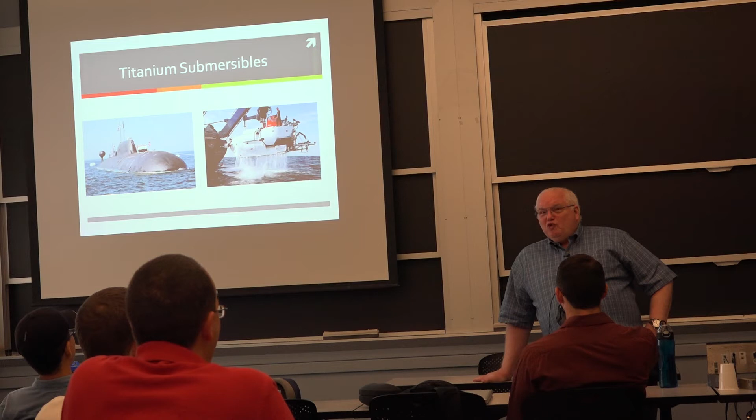2 million Americans went across the ocean, and they didn't have a whole fleet of ships in 1917 to do it, so they created the Emergency Fleet Corporation. It turns out the Germans scuttled every German ship in every port in the United States when the war was declared. They tried to destroy them, and I can give you articles from a history of welding on how welding was used to repair and bring these ships back into service, even though the Germans tried to sink them in the harbor as they sat there. So welding was important, and Comfort Adams realized that welding should be important, which led to the formation of the American Welding Society in 1919.

That's about the time arc welding started to surpass resistance and oxyacetylene welding. In Europe, we actually know who it was: in Göteborg, Sweden, one welder stuck his bare steel electrode in the mud and welded with a muddy electrode. That's the basis of shielded metal arc welding, mineral-coated electrodes.

Now we have special mud that costs about $10 a pound, very chemically controlled. We use things like old tobacco stalks for the cellulose. Anybody know why we use old tobacco stalks? That's actually a proprietary secret, though it's not much of a secret.

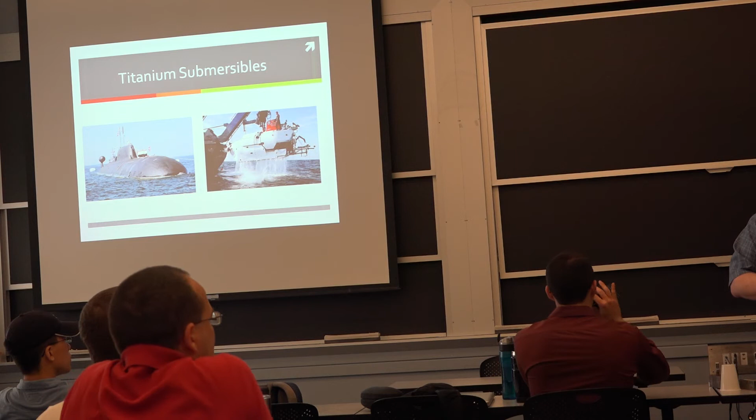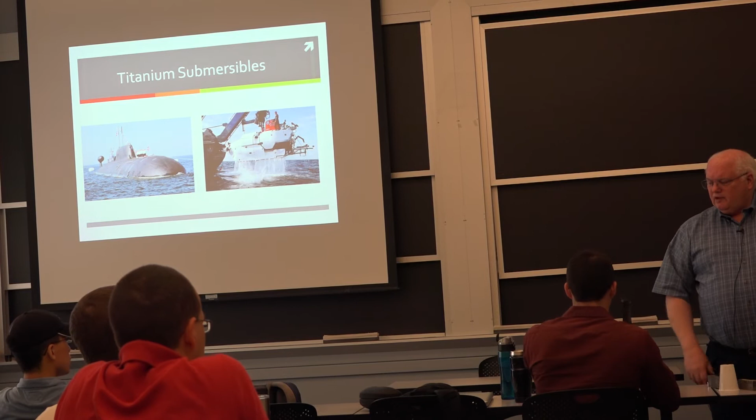So this is a turbine blade, or three stators that go in a civilian engine. This came off a Mexican Airlines commercial jet. If you look carefully, you'll see a darker color at the bottom - that's because these have already been repaired once, and they put an aluminized layer on there to help with oxidation resistance. This one came out of an operating engine, and it had a lot of other blades like that, that had failed.

Due to sulfidation corrosion. We might talk about that sometime, but just to give you an idea of some things. This looks like a postcard cutter. This one failed in operation.

The honeycombing is the seal. When the thing's spinning, you actually put a honeycomb in there, and as the blades get longer in service, they rub up against it. They're intended to rub and seal the surface, so the amount of elongation of the blade in service is approximately the thickness of that honeycomb layer. It forms a very good seal because it's a wear seal.

So it's just due to heat and angular momentum? Like it spins, these grow in length over time? Yeah, the heat, the creep of the metal. The metal under stress, radial stress, centrifugal stress, grows over time, but the whole efficiency of the engine has to do with how good the seal is.

The original engines, which were not very efficient - maybe we'll talk about that a little here - they basically just had labyrinth seals, which were kind of rings that passed each other. But eventually they got into the honeycombs, which actually use a wear surface. That's a very good seal, and I think there's less than 1% loss, because whatever you lose, you're losing compression - which is pressure and temperature, that's what makes the engine run.

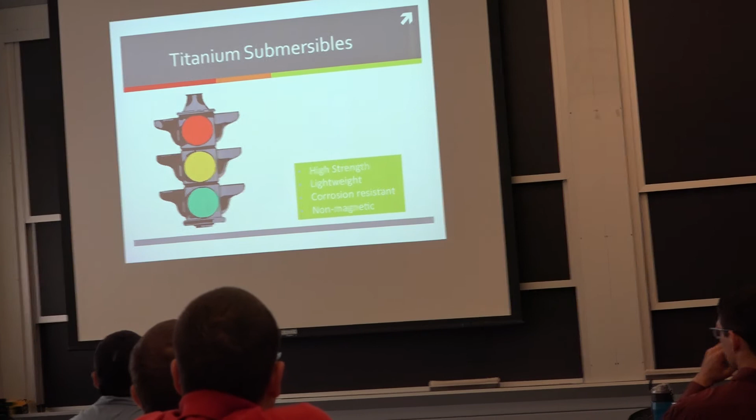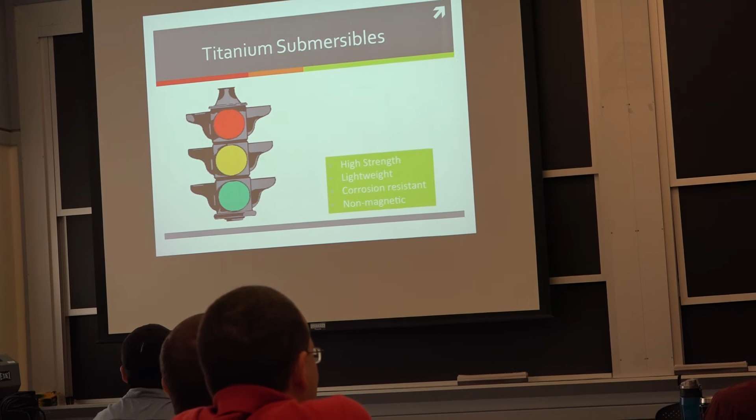So let's talk about titanium submersibles. There's both civilian and military reasons for using titanium in submersibles. Some positive reasons: it's high strength, lightweight. Why do you need high strength and lightweight for a submersible? To come back up - if you lose power, you'd like to just let go of some ballast and float to the top. That works best with high strength and lightweight.

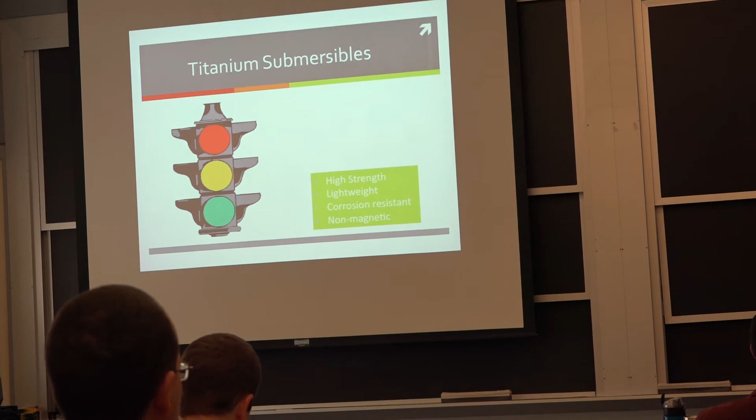You can go deeper with high strength and lightweight. You also want something that's corrosion resistant. The Achilles heel is steel. In material selection, steel makes up 97% of all metals used, but its Achilles heel is corrosion resistance - unless you're from the steel company, you know everybody has to replace it every 30 years. But titanium essentially lasts forever. We use it as medical implants in the human body because it can tolerate that saline solution for the life of the patient.

Without any noticeable corrosion, and it can do that for ships too. In fact, they went from a 30-year lifetime on a ship to now advertising ships that are supposed to last 50 years. They had to get away from carbon steel because most of it was full of holes after 25 years. Did any of you serve on those ships? We still do carbon steel inspections all the time, well, for the first 2 years anyway. But with titanium, which is a bit more expensive, lightweight, thin wall, there should not be any real corrosion problems.

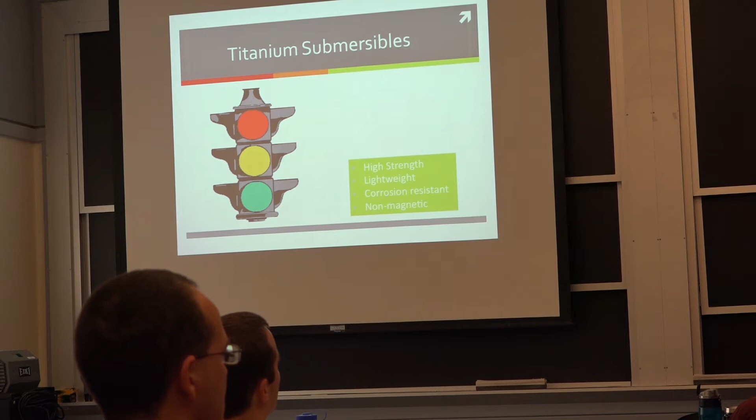Anybody know of any corrosion problems in titanium piping? It's not really corrosion, but there's a lot of growth inside of it, biological growth and other things. So now we do that on land too, we actually put biocides in the water in our boilers. Well, you probably don't do that in your boilers. Oh, we just use chlorine generators. Okay, so anyway, there's different ways to do things.

Another big military thing is non-magnetic. And why do you want to be non-magnetic? Signatures. Signatures for what? Mines. It turns out the superconducting quantum interference device is called a SQUID. Anyone ever heard of a SQUID?

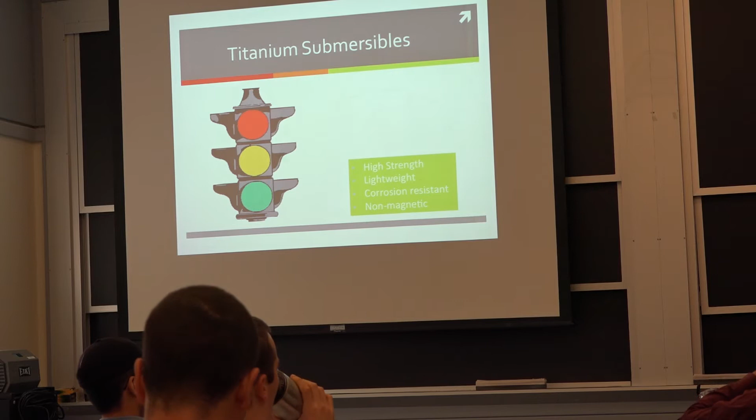I'm not talking about the ones you eat, this is a device invented by Brian Josephson in 1962, when he was about 22 years old. He didn't invent the SQUID, but he discovered the Josephson effect. He was a 22-year-old graduate student at Cambridge, and his professor didn't have time to talk to him, so he gave this new student a standard math problem to go solve. Brian was so naive, he didn't know you were supposed to throw out an inconsequential term in the differential equation.

You guys are learning how to solve these problems, right? Maybe one of you will make a mistake on your homework and win the Nobel Prize. But Brian essentially didn't know to throw out this term. He solved this incredibly difficult problem with the complete term included, and discovered the Josephson effect, which says that even for DC currents, you actually get an AC component with superconducting energy flows. It's now known as the Josephson effect.

With the Josephson effect, you could measure very precise magnetic fields. I met Brian Josephson in about 1970. He had already won the Nobel Prize when he was like 24 or 25, and he was an absolute basket case. He was not ready to win the Nobel Prize in his mid-20s, and everybody thought he was the brightest guy in the world. He knew he had made a mistake, but he was smart enough to recognize it was something unusual.

In the 70s, a plane flying overhead with a superconducting SQUID could detect something under the water that was long and magnetic, for its magnetic signature. It was projected that sometime in the 80s, a satellite from 100 miles up could do the same thing with improvements in SQUIDs. I haven't kept up with it, but I suspect right now you don't even have to fly a plane over, though when you do, you probably get a signature. Even satellites can pick these things up.

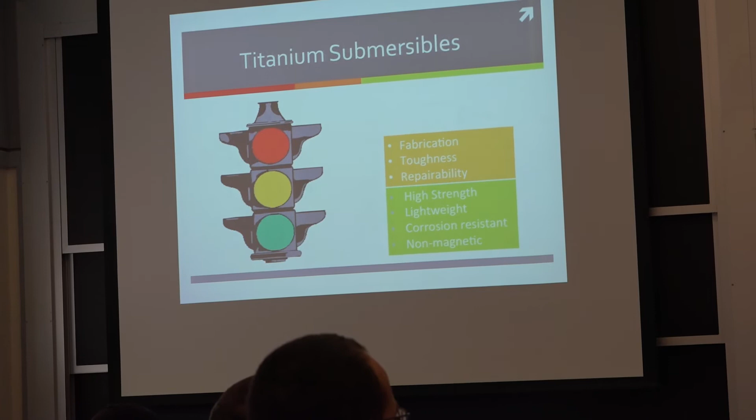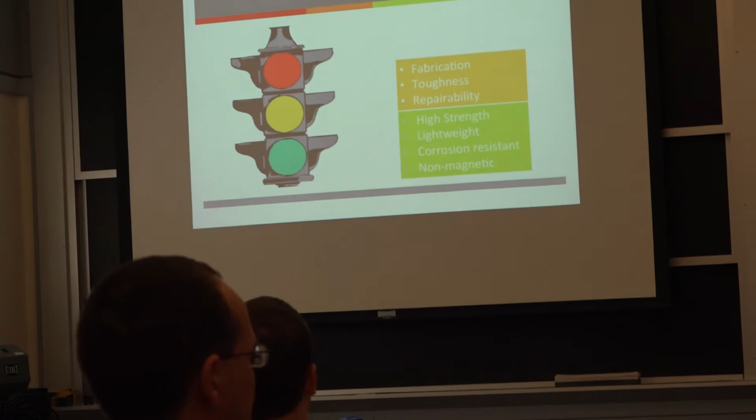I broke this piece of plastic yesterday, titanium's more brittle than steel. Steel has 2 to 3 times the toughness of titanium for equivalent strength levels. So it's best not to take a depth charge in a titanium submarine compared to a steel submarine. As Professor Flew used to say, the Navy HY steels allow the people in the submarine to be slowly crushed to death, whereas in other submarines they just break apart, and you'll drown. Anyway, fabrication, toughness, and repairability matter, one advantage of steel is it's easy to repair relative to almost all other materials, including aluminum.

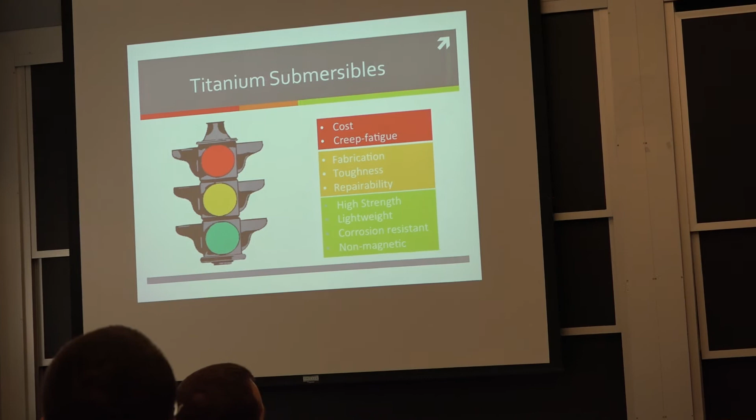And the real problems are cost and creep fatigue. So what about the cost? Well, one of the problems is HY steels cost about $2,000 a ton, give or take.

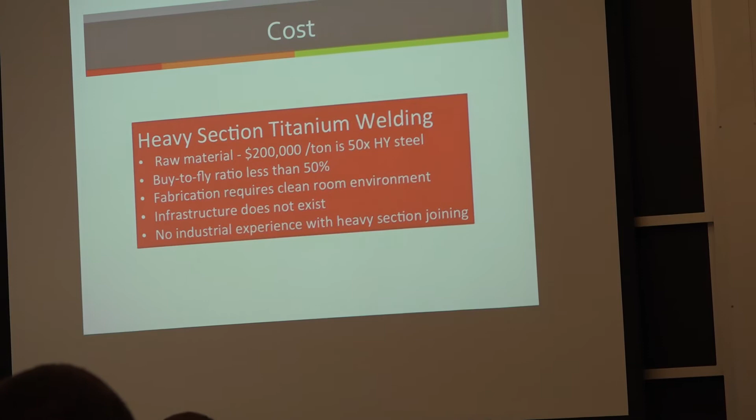Titanium is about $100 a pound, or $200,000 a ton, about 50 times the price of steel. If you think of a submarine like the Seawolf, which was supposed to be a $2 billion submarine, the hull, mechanical and electrical, primarily the hull, was $500 million. The rest was all those missiles, electronics, and sonar, and they add up. That's the big ticket items.

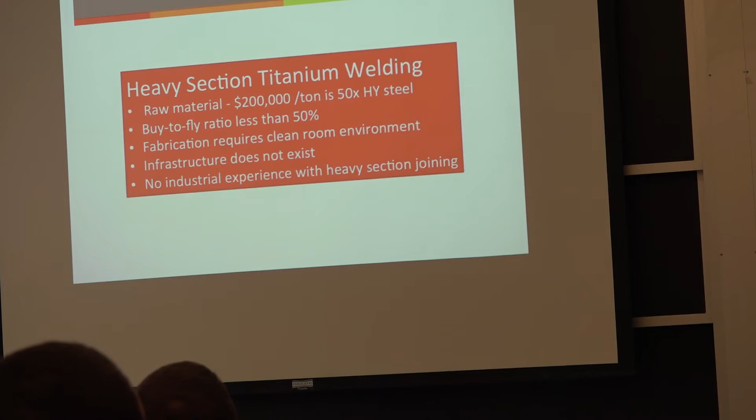This is all sort of true in surface ships too. It's the armaments and stuff, not the hull, that's so fabulously expensive. But if you start saying, well, if the hull of the Seawolf costs $500 million, then a titanium sub might cost $25 billion, you start saying, I don't know if we can afford very many of those.

More expensive than a carrier. The buy-to-fly ratio in shipbuilding in general is less than 50%. The buy-to-fly ratio is an Air Force term: how many pounds of metal do you buy versus how much actually goes into the aircraft. A lot of aircraft components used to be in the 2% range.

You buy 50 pounds to fly 1 pound, so if you're buying something that costs $30 a pound, a nickel-based superalloy, all of a sudden the price goes up by a factor of 50 to $1,500 a pound for the part that's been cast, forged, and machined. You machine away everything for lightweight, but then your material costs go astronomical on some of these things.

Shipbuilding's not so bad. You start out with rectangular plates, cut out funny shapes, and bend them, but you still get less than 50%. Half of the material you buy from the steel mill goes back to the steel mill to be remilled, so your $2,000 a ton becomes $4,000 a ton.

I remember the materials research needs for the 21st century article, which referenced a study NAVSEA had Newport News do around the mid-1990s. They were looking at the weight of the Nimitz class carrier.

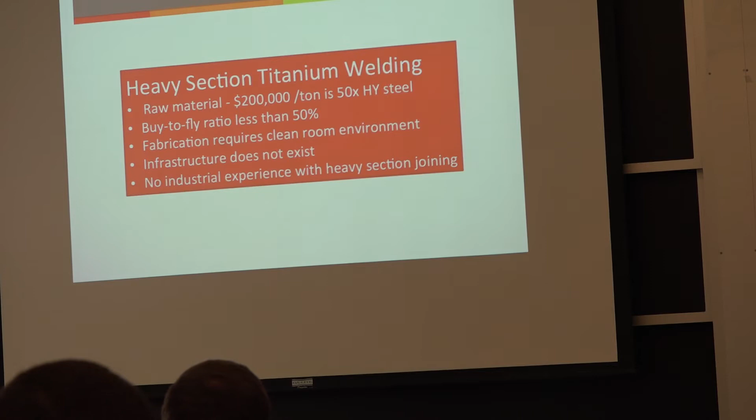So they were trying to figure out, a lot of the steel on a carrier is just regular old ES grade 50 KSI steel. They wanted to know if they went to HY 60, or HSLA 60, could they save money in welding, material costs, and weight. They found they could take out 2,000 tons out of a carrier if they went to HY 60, but it showed the as-fabricated cost was $10 a pound.

The cost of buying the raw material was $1 a pound. I had a rule of thumb I was teaching in my course, that material costs are only about 10% of the as-fabricated cost, so the as-fabricated cost will be 10 times that. This is after inspection, design, scrap, and all these other things. You could take my material selection course, which you're not, but that table is in the 21st Century Defense Needs article.

So I was teaching this and found out NAVSEA spent over $1 million on this study at Newport News, and they found the as-fabricated cost of the HY60 was going to be 10 times, or $10 a pound, which was exactly what I'd been teaching. I would have done that study for a lot less.

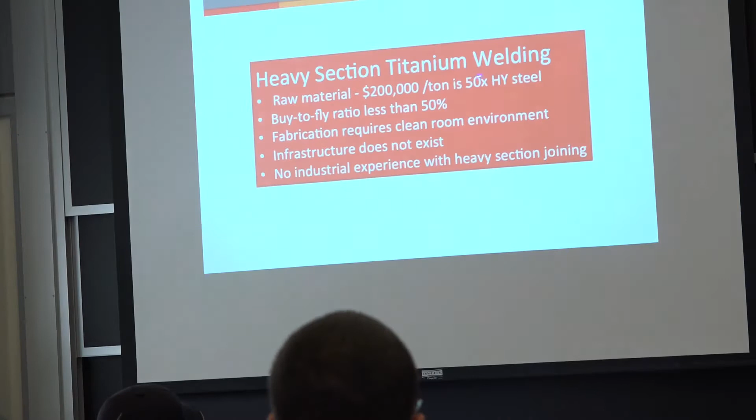So you've got to remember that raw material cost is just a small fraction of the whole thing. Fabrication requires a clean room environment. I used to tell people down in Washington, you can't build a titanium ship in the same shipyard that you build a steel ship. It's going to be more like an aerospace facility.

Okay, it looks a lot - it's going to look a lot different.

Basically, when welding titanium, it's kind of white gloves. If you clean titanium before welding, you better not touch it with your fingers, because that fingerprint will introduce porosity in the weld. I've got a story on that a little bit.

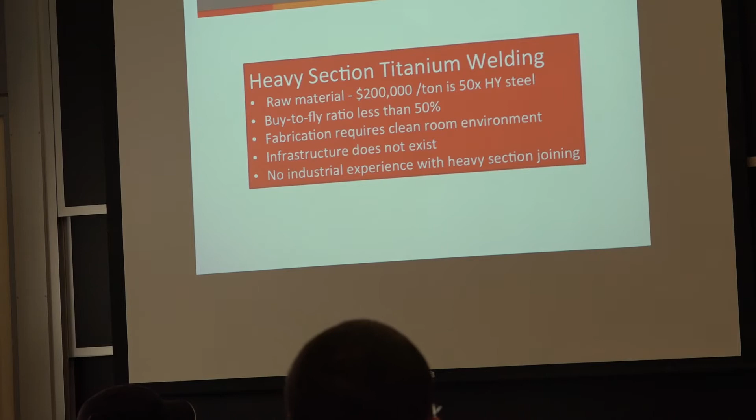Okay, infrastructure does not exist in the country. Titanium, TIMET, the world's largest titanium company outside of the Soviet Union, basically leases time each month - about 1 or 2 days - at a steel mill to roll their titanium ingots into plate.

They could not afford a $1 billion mill to roll titanium plate because they would only be busy 3 or 4% of the time. So the titanium industry isn't big enough to really support a fleet of ships - heavy-walled ships.

No industrial experience with heavy section joining. After the Alfa class came out, or was announced in 1979, I remember my first trip to Europe. I was coming back on the airplane, reading the International Herald Tribune, and there was an article on the front page about the Soviets now having a titanium submarine.

It was 1979. They had actually laid the keels for the first Papa class in 1964. And I'm sure the U.S. Navy knew about this, because my first research contract was in 1977 with the Office of Naval Research.

It was for welding of heavy section titanium, and here are some of the welds that I kept. Pass them around - this shows submerged arc welding of titanium. These welds were made by John Galati in 1978 or so.

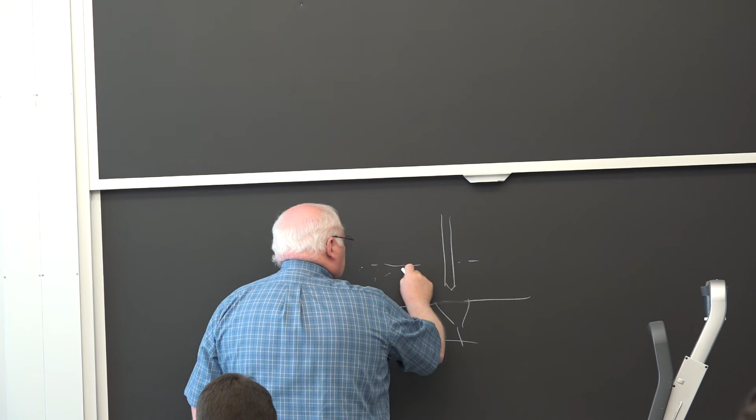So here's your plate down here, and you want to weld this little groove in a 1 inch or 2 inch thick plate. You put this layer of flux - it's like sand - and just pour it on the surface.

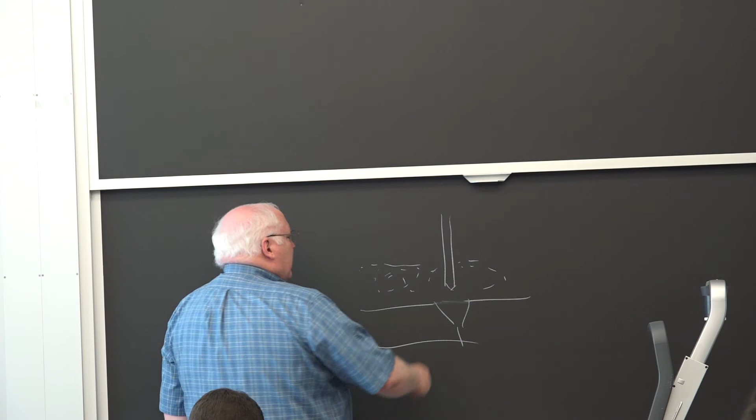It costs you $2 a pound today for this special chemistry sand. The arc is submerged beneath the surface. You can sit there and watch, and all you see is a little puff of smoke and a little flash every now and then, submerged beneath the sand.

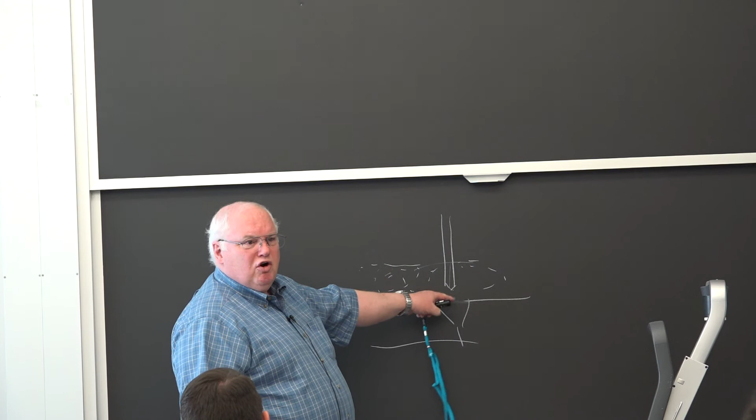The arc is down here. You can run these things at 600, 800 amps, and make great big welds very quickly, but only in flat position - you can't do it vertical or horizontal.

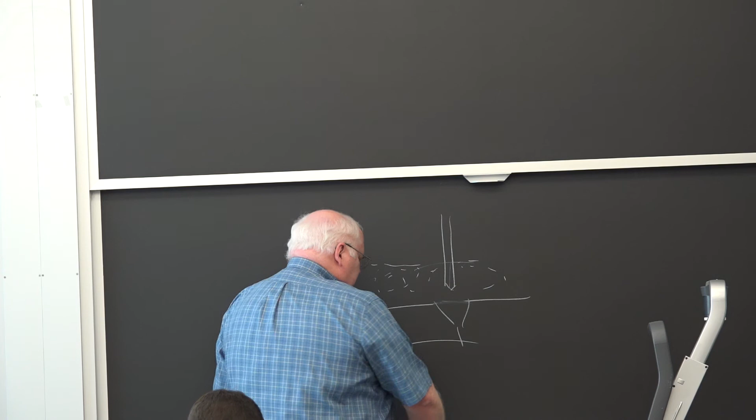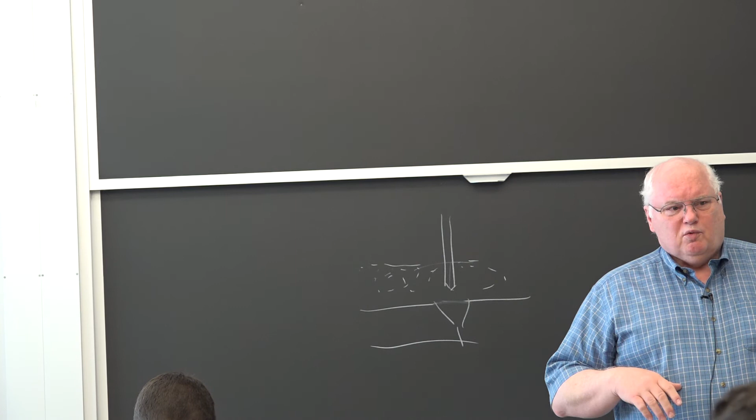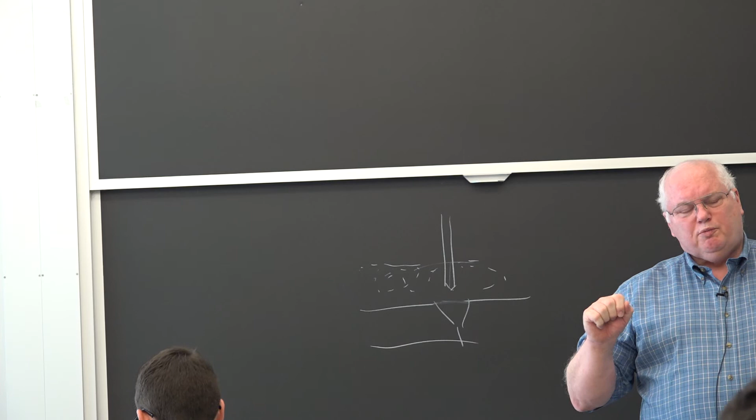Okay, but that was for steel. The Soviets were publishing - there were two journals, Welding Production and Automatic Welding, translated from Russian into English by the Welding Institute in Great Britain, coming out a few years later.

But you could go to the MIT libraries - we had these journals, and I would go read about these things. There's a bit more to that story. The Soviets were publishing things up until about 1972.

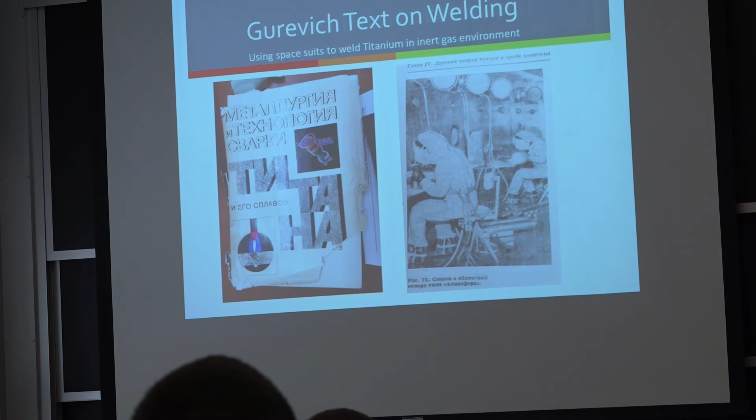And then all of a sudden this guy Gurevich - here's Gurevich's text. When Jimmy Carter had détente, we had some Soviets come visit the lab, and actually some Soviets came and worked in U.S. labs for 6 months, not at MIT, but other places.

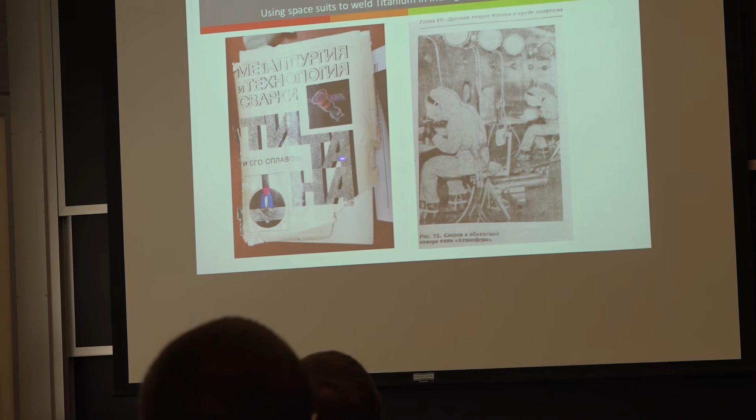Professor Pokhodnya was at the Paton Institute, the world's largest welding institute. At the time it had about 5,000 people; now it has about 10,000. We could talk about the Soviet politics of how you end up with a welding lab that big.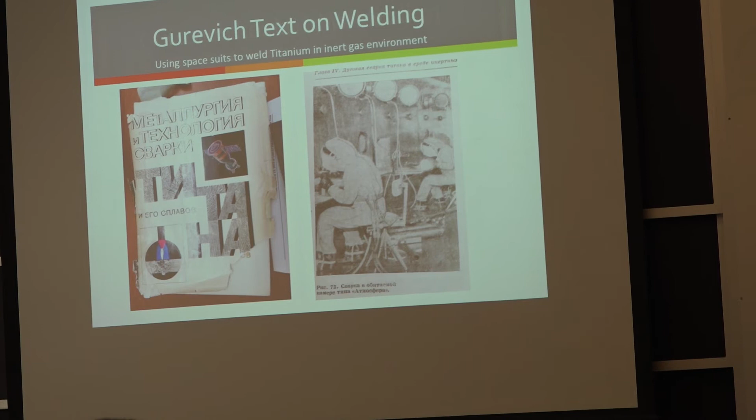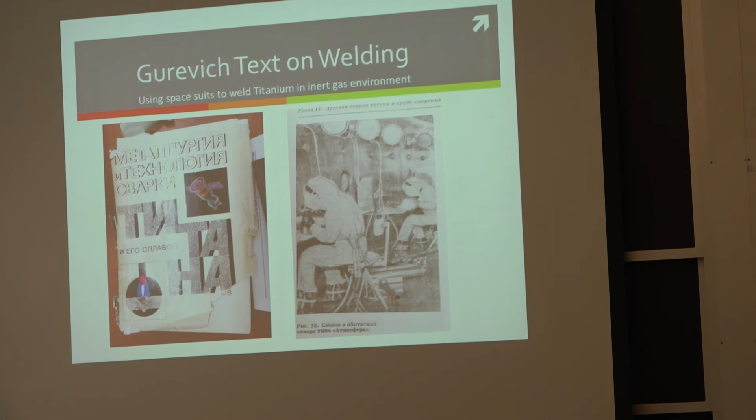But it has to do with the guys in the Soviet Union - there were 7 guys in the Soviet Academy of Science who could hand out all the research money, like our National Science Foundation and Office of Naval Research all rolled into one, and they would send it to the different provinces. Professor Paton was one of these 7 members of the Soviet group.

And when it got to the Ukraine, which was the richest province in the Soviet Union, whatever you want to call it, he was head of the Ukrainian Academy of Sciences.

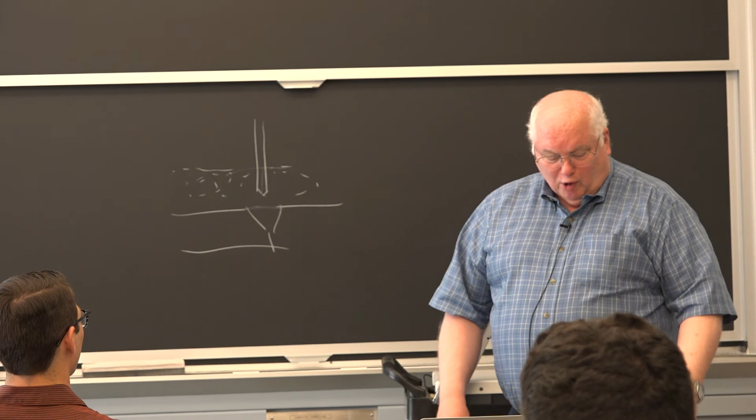So all the money came to Ukraine, he just got divvied up. And guess what? His lab was the best funded. Surprise, surprise.

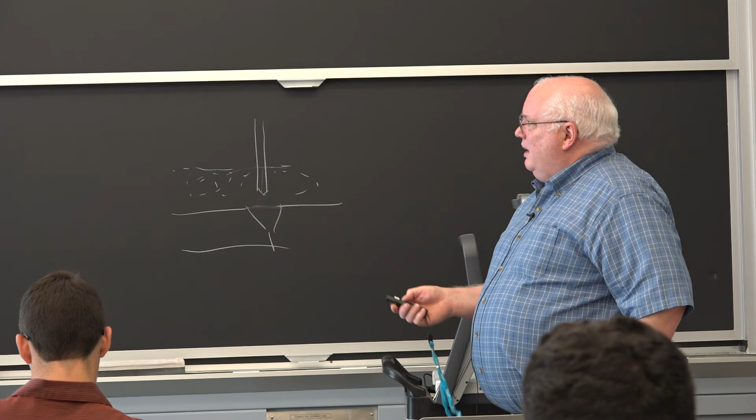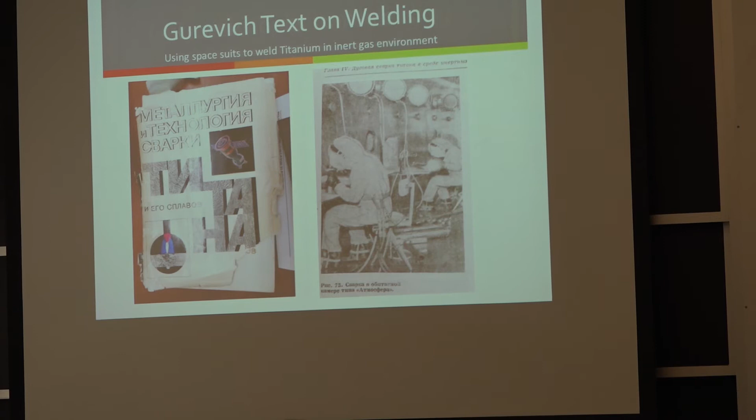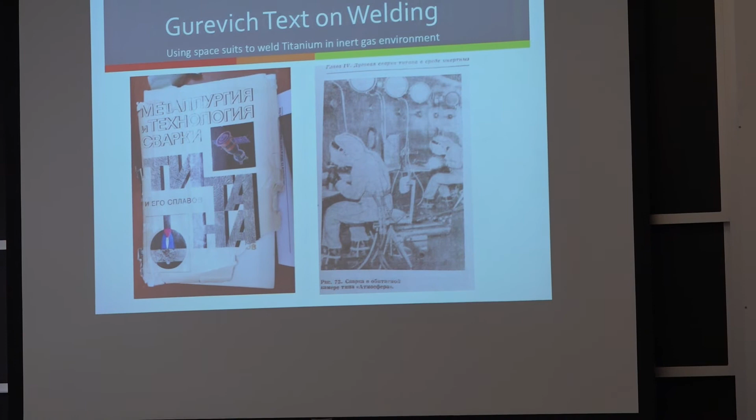Here's a picture from the inside: titanium, these are guys in spacesuits breathing air inside an argon chamber welding titanium. That's one way to do it, but you have to have a big enough industry and infrastructure to do that. There's a picture of the letter they sent me, in 1980 or whatever.

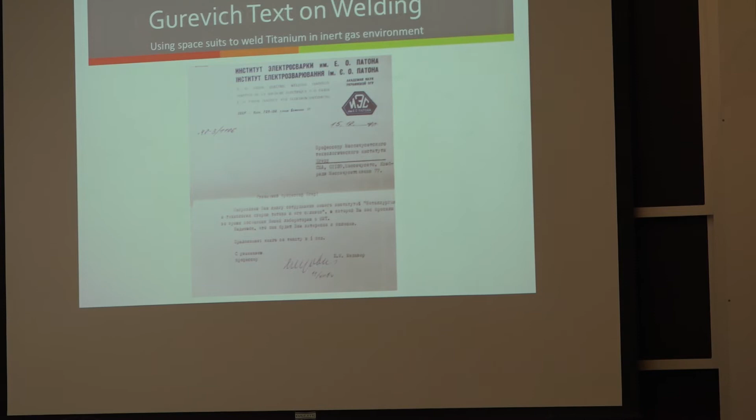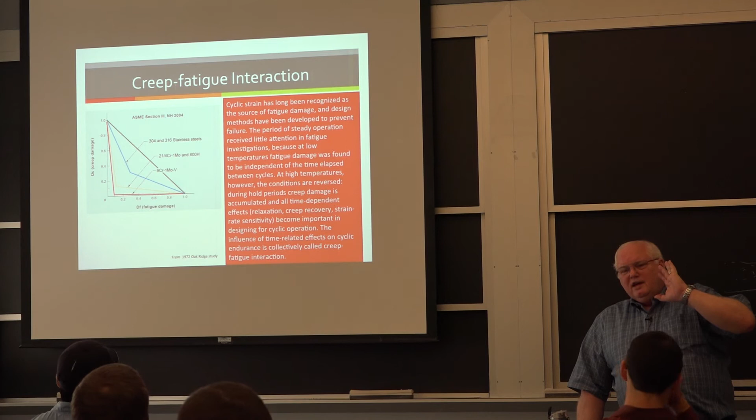Now, one of the problems is a creep fatigue interaction. I remember after the Alpha Sub came out in 1980 at David Taylor in Annapolis, there was a detachment right across from the Naval Academy. That's where their weld lab was, and I used to spend some summers there. We had a conference on welding of heavy section titanium, a two-day conference. The first day was Industry Day. Boeing, McDonnell Douglas, and Northrop Grumman came in. The heaviest section any of them talked about was a quarter inch; most were talking an eighth of an inch. That was heavy section to the aerospace guys.

I was the only non-Navy person speaking on Navy Day, the second day, because I had this research project to weld using submerged arc welding. The Navy had been spending about a million dollars a year trying to perfect gas metal arc welding of titanium. But it was a lower level effort, because the Naval Research Laboratory in Washington had found one of the problems with titanium: there's something called a creep fatigue interaction.

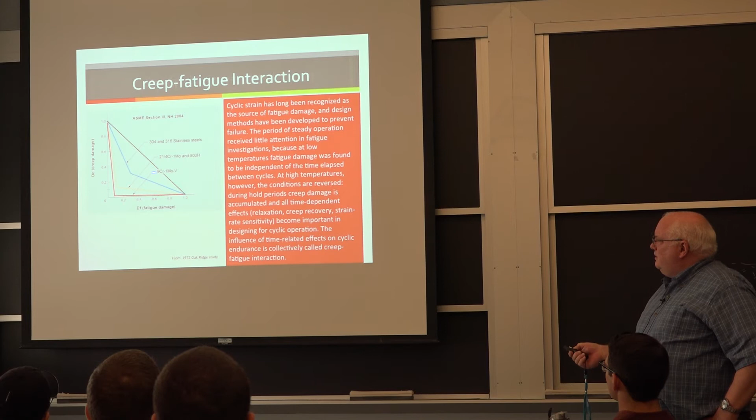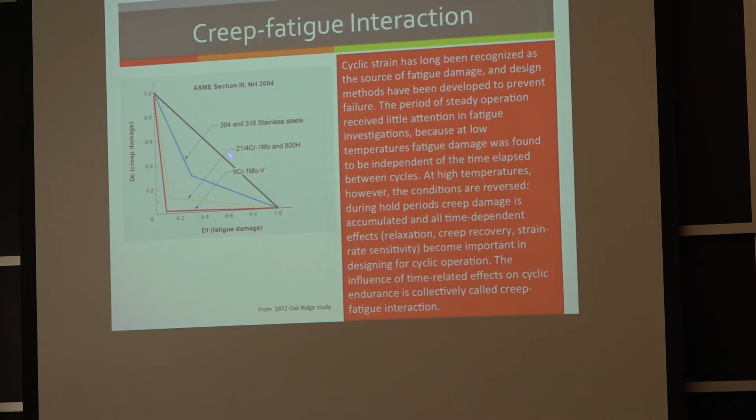So with fatigue, if you bend a paper clip back and forth, eventually it will break from fatigue, static cyclic loading. Oak Ridge and others had studied the effect of creep damage, where you have a constant stress at temperature, versus fatigue damage. Ideally, if there's no interaction, you'd expect the black line on this plot. But in some nuclear reactor vessel materials they wanted to build reactors out of, there was a creep fatigue interaction - basically a little bit of creep would destroy the fatigue life. That's the red line, 9 chrome, 1 moly steel.

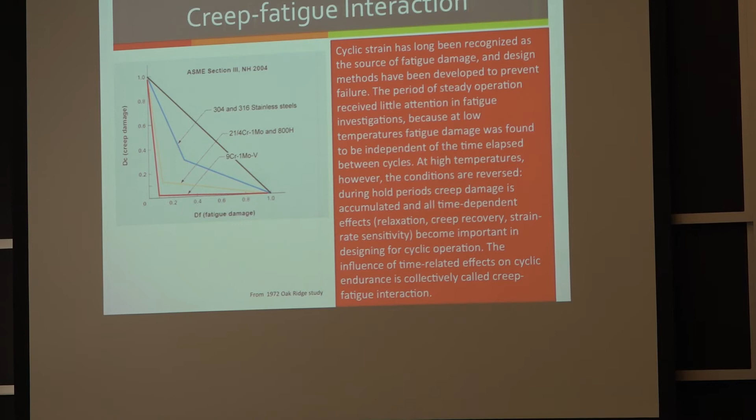The Navy did studies on titanium because, hey, when you're underwater you've got a constant compressive stress, and then if you go up and down you'll have cyclical fatigue stress. I remember going to this workshop, and the guys in the Navy said the Soviets came out with this stuff - how did they solve the creep fatigue interaction? I said, I don't know. And you know what the answer was? They didn't solve it. You guys are starting to learn how these Soviets worked - they weren't quite as thorough about everything.

My first welding of titanium had to do with 1969. I was 19 years old, a summer intern in engineering at the Naval Air Rework Facility in Norfolk, Virginia. It was the Vietnam War, and we had a TF-30 engine, an aircraft engine whose typical life back in 1969 was 500 operating hours before a complete overhaul was needed. They needed more TF-30s in Vietnam, and we had to repair this one. They found a crack on the compressor case at the inlet. It was all boxed up, ready to be signed off, when someone found it was cracked - that meant a 3-week tear down, re-tear down and repair.

So the manager of engineering decided we were going to repair it in place - weld it in place, stress relieve it in place. He put me in charge as the engineering person overseeing this. Well, what did I know? I was going to be a sophomore the next year, having just finished my freshman year at MIT. I could spell titanium, but that was about it. Anyway, I went out and watched this guy do peening with a vibrating hammer on these little test strips.

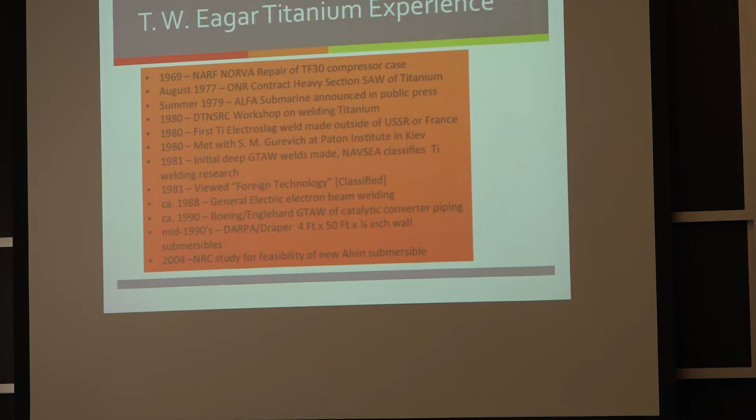So I come back in, and he said, well, you witness it? I said, yeah. I said, how'd it go? I said, I don't know, you know. He says, well, sign this. And he needed 2 signatures, okay? And I said, what does it mean if I sign this? He says, if that plane goes down, you'll be in jail within 24 hours. I said, oh, okay. So I signed it, realizing that, okay. Anyway, so that was my first experience. I didn't do any welding, I just watched another guy weld.

I got my first contract at MIT in August of '77 to do the Submerged Arc Welding of titanium. The ALFA submarine, I read about it on the International Herald Tribune coming back from Europe.

1980, we had a workshop on welding titanium. And during that workshop down in Annapolis, I was sitting there and I was kind of thinking back to all this literature I read about Gurevich's work. And I realized, he quit publishing on Electro Slag about 1972. There were lots of articles in the 60s and early 70s, but he just quit publishing on it. I said, I bet you they used Electro Slag. And I went in and I told everybody, I said, I think he used Electro Slag. And they kind of shrugged their shoulder at me.

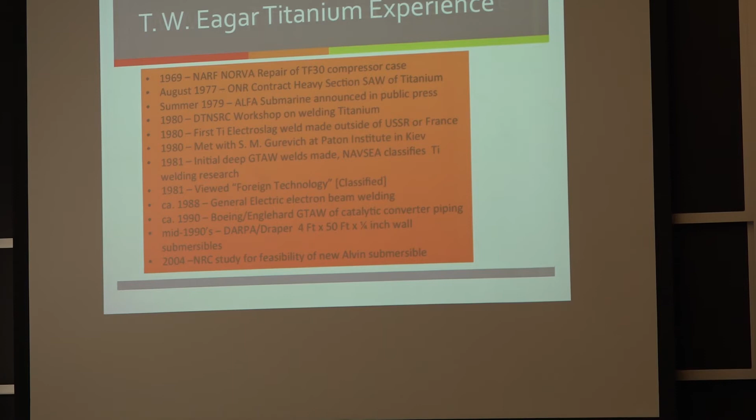I came back, and two doors down, we made the first Electro Slag weld outside of the Soviet Union or France—they made one in France. And it looked terrible, absolutely terrible. But it deposited metal and it didn't use much flux. The problem with the submerged arc process was it was using 8 pounds of flux for every 1 pound of titanium, and the flux was costing $100 a pound. I determined this was uneconomical. I actually did a mathematical model to show how uneconomical it was compared to steel. So I knew that submerged arc welding, while we might be able to make it work, was going to be an economic disaster.

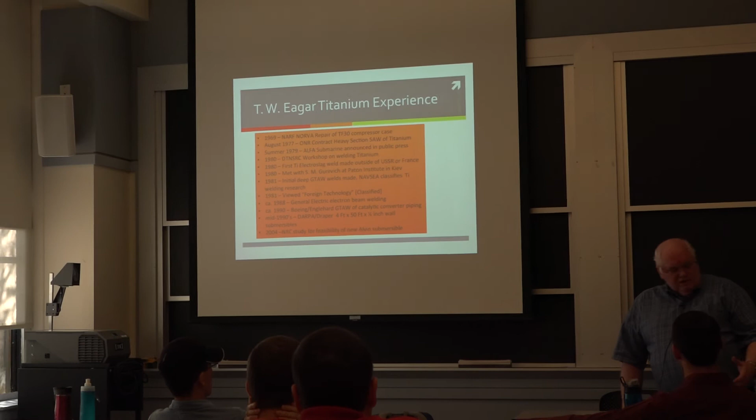I made the Electro Slag weld, reported it to the Navy, and then what did they do? Down here, in '81, they classified all titanium welding research. So I was out of titanium welding for a while, okay? Because you can't do classified research on campus.

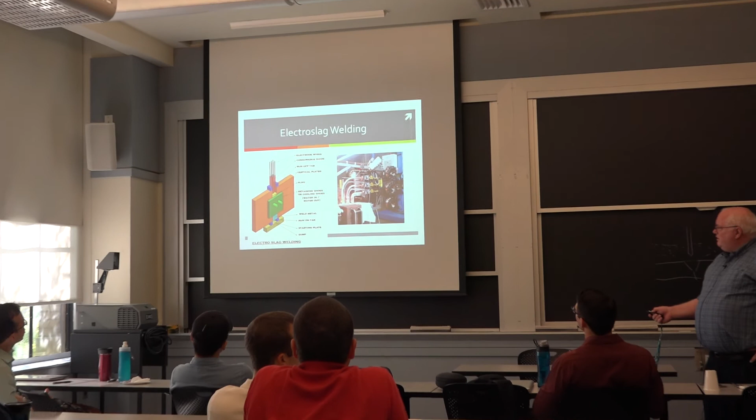This weld that I passed around yesterday is a 2-inch Electro Slag weld. Let me show you the next slide, which is a picture of electroslag welding, which is different than submerged arc welding. You basically have two vertical plates, water-cooled copper shoes, a base starter tab. You feed electrodes in, and you're only going to use a few ounces of flux. The flux is just a resistive heating element, and you melt the electrodes, and it makes it weld very quickly. We put down a 2-foot high weld in about 5 or 6 minutes.

That's why it's such a bad weld. But in titanium, it turns out to be a very efficient process. So that's a cross section through a 2-inch thick weld. This is one plate and this is another. Yep. And this is the weld between. Yep, that's the weld, great big weld. I mean, the weld is half of that thing, right? And that's just a slice through it.

That was made at Oregon Graduate Center where they could do classified research. It was given to people at that Oregon Graduate Center. The slag material—no, it's a calcium fluoride, strontium fluoride mixture. So you don't lose strength there? No, there's no slag in there. The slag just floats on top and you chip it off with a hammer afterwards. If you've seen them chip off welding flux on steel, the slag is just disposable at that point.

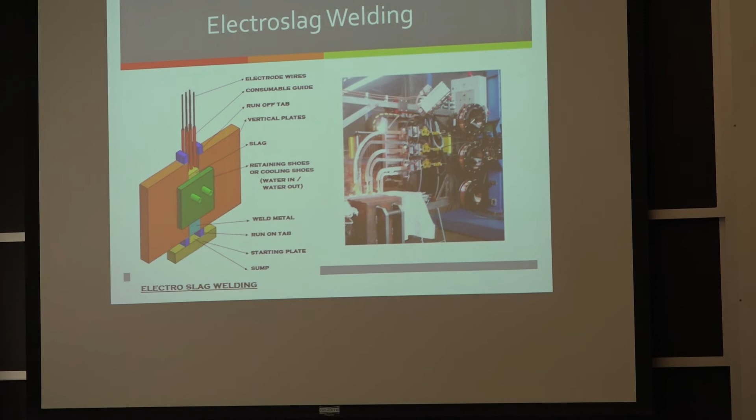And I'll tell you, half of this book is about how to purify your fluxes. We were using reagent-grade single crystal calcium fluoride optical materials. There's a place out in western Massachusetts—this was the purest calcium fluoride we could find, and actually some of those things I sent around had notes on them. We could make welds that had lower oxygen and nitrogen than the base plate if we made them under this optical quality.

But that's why I was paying $100 a pound. I was crushing up old pieces of optical crystals to make a flux that was just going to melt. But the Soviets would take commercial purity calcium fluoride and strontium fluoride and other things, and they would melt them in a platinum furnace under a hydrogen fluoride atmosphere to get rid of the oxygen, the calcium oxide. A 1% calcium oxide impurity in your flux would destroy the mechanical properties of the weld in terms of oxygen. So very, very critical on the purity of the flux.

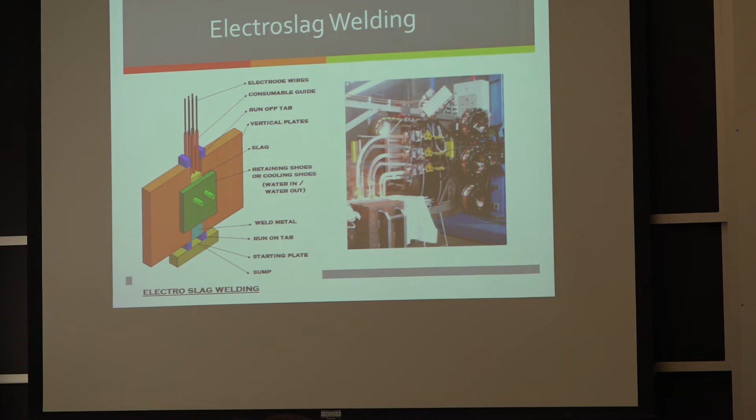This is something called deep TIG. It was called semi-submerged arc when it was translated from the Russian. Here are some welds—you can make beautiful titanium welds on this smaller one. If you look on the end, there's a weld on both sides. And if you weld in the presence of a flux, you can use the exact same welding parameters, but in one case you'll get a shallow weld, in the other case you'll get a deep penetrating weld. They call it deep TIG, or gas tungsten arc welding. The Soviets had been publishing on this since the mid-60s. No one had really been paying much attention to it.

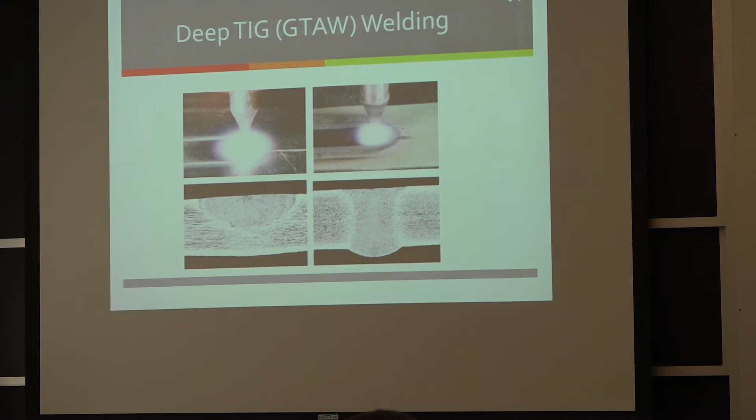I came back and made some of these soon after the electroslag work. And it turns out, without getting too much into things, in '81 I was invited—one of the only two times I've ever used my security clearance—to see some foreign technology down at Annapolis. Now it's been more than 30 years, so it's probably declassified, but I don't know. But I can tell you that the way they built the ALFA sub was electroslag. I'll tell you that. You could figure that out because you can see the research and papers published by the Navy after 1980.

They were doing it on steel and other things, but they were really interested in the titanium.

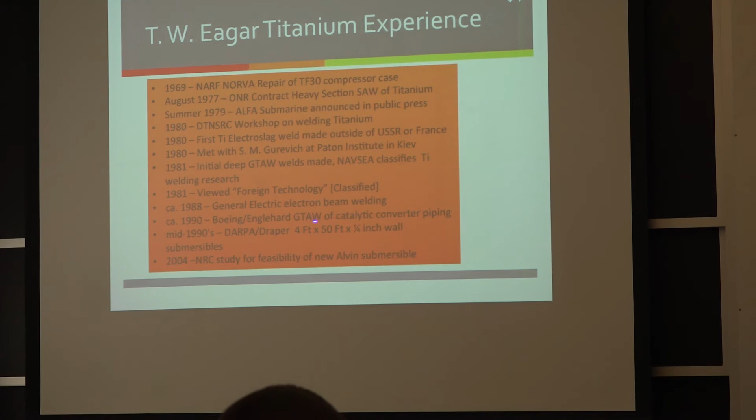If I stop here—unless you need to stop here? Do you have a class? Anybody have a class? I don't know about that. Ours is 9:30. You want to go a little bit later and finish up the other stuff on titanium? Is that all right? Yeah. Okay, so...

What else? So, General Electric electron beam welding. I got a call in the late 1980s from a guy at General Electric here in Lynn, Massachusetts, welding up a titanium compressor case. They took two pieces of titanium worth about $25,000 a piece. They were going to go into the jet engine and weld them into one piece worth about $70,000. And they had been doing this for years on this engine and had no problem.

I had a research contract to do resistance spot welding in the mid-80s with these guys. One of their engineers calls me up and says, Tom, can you help us, we have a problem welding titanium. I listened to him and said, Lyle, when you clean it with acetone, I told you you have to use white gloves, and they were using white gloves. I said, when you use acetone, you've got to use reagent grade acetone, because most acetone has a little bit of grease in it unless it's reagent grade. When you clean it with acetone, there will be a thin film of grease on there, and that grease is going to introduce hydrogen, which introduces porosity into your weld. You've got to use reagent grade acetone.

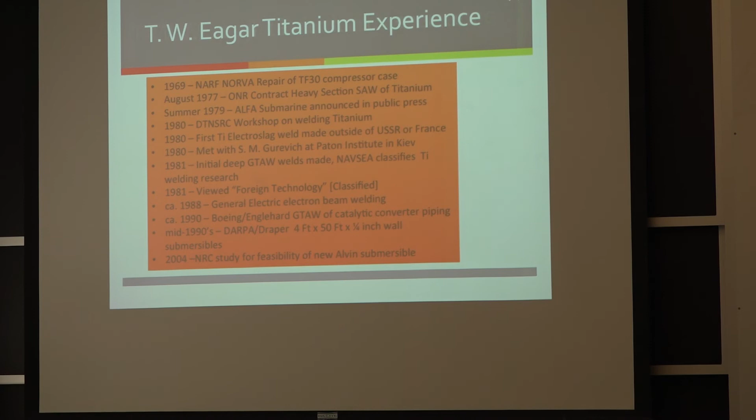So about 3 weeks later, he calls me up and says, Tom, we're still having this problem. It's costing us $250,000 a month. Can you come up here and help us with this? I said okay. He says, oh, by the way, we don't have a budget for this. Can you do it for free? I had a research contract with him, so I said okay.

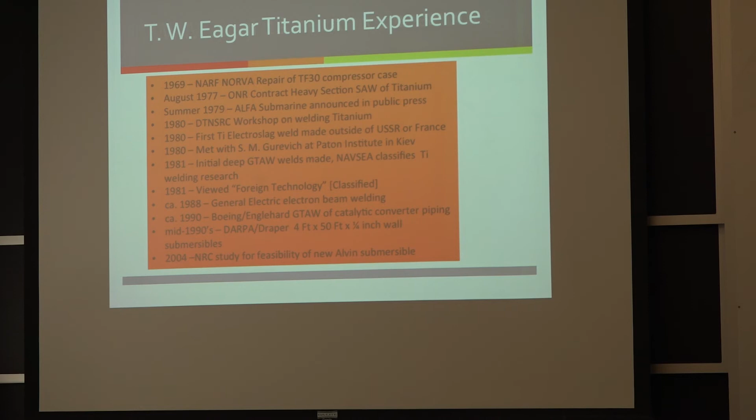So I go up there, and I show up at 7 o'clock in the morning in Lynn, and he walks me through the cleaning process. It's a good cleaning process.

And we go into the electron beam welding room, and 17 GE engineers show up. Now, I don't know what they were charging their time to, because I know that no GE engineer does anything without an account number, okay? But they must have had some account number for those 17 people to be there.

And so I'm sort of the center of attention, and I was interested in seeing the surfaces before they put the 2 of them together for electron beam welding. And I'm sitting there, I just inspected over here, and I'm looking over here on the surface, and I look back over there, and there's some white specks that were not there 10 seconds ago. It was raining white dust in this room.

And I said, what's that? Well, the foreman said he had already cleaned that. If you would let him do his job, he would have had it all put together without any of the dust. At that point, everybody decided I was a doofus and didn't know what I was doing.

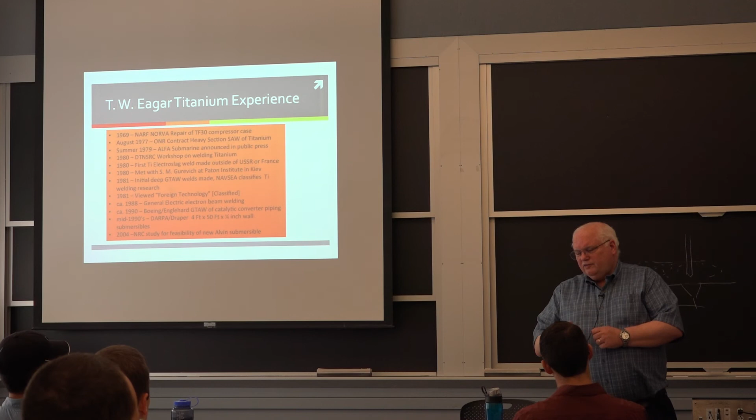And so I went and looked, and I found over there, everybody's no longer paying attention to me. They're going to get the thing in the machine. And I found a little glass slide, and I took out my handkerchief and cleaned it real well. And I took some of that acetone that he was squirting on there, because I'd asked if Lyle had gotten reagent grade acetone like I suggested, and he said no, he hadn't.

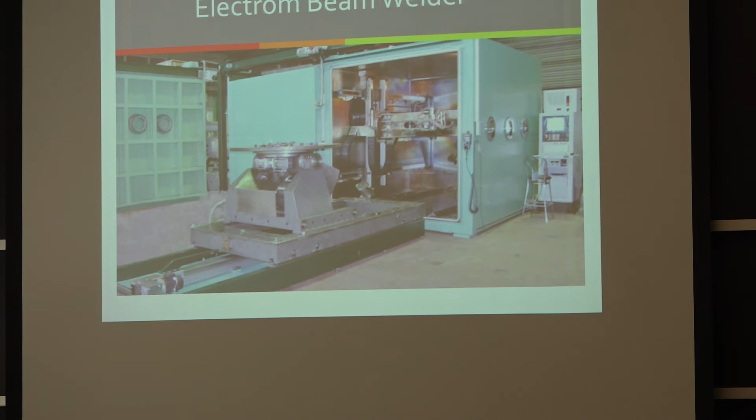I have a picture of an electron beam weld machine. So there's the type of machine that has a little turntable, the electron beam welder. And I took the acetone, squirted it on there, and blew it off to dry it. And I could see Newton's rings.

Anybody know what Newton's rings are? You ever seen an oil slick on water, and then a little layer of oil on top of the flat surface? You get interference colors where you have a quarter of the wavelength of light with the thickness of the oil. And I showed a couple of people Newton's rings in their acetone, and they all ignored me.

So we went... at 11 o'clock, Lyle says, well, let's go have lunch while the system's pumping down. We came back after lunch. It had a leak, and the vacuum system wasn't working.

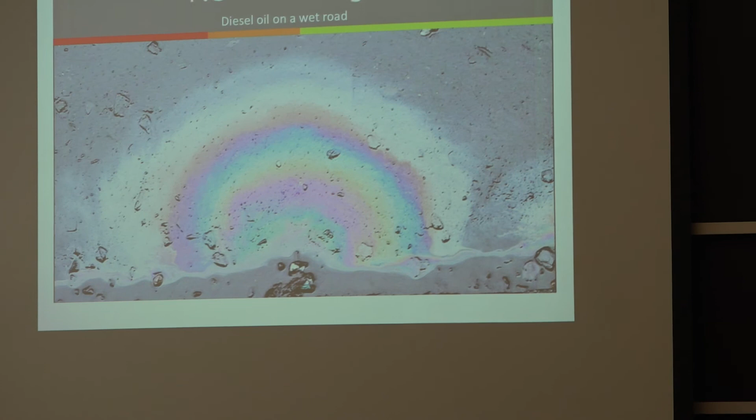I said, oh, I'm going. I said, well, you get some reagent grade acetone. And so, next thing I hear, about 3 weeks later, they had welded up 6 of them, and they had not had any porosity since he got the reagent grade acetone, which is what I had told him to do 2 months before.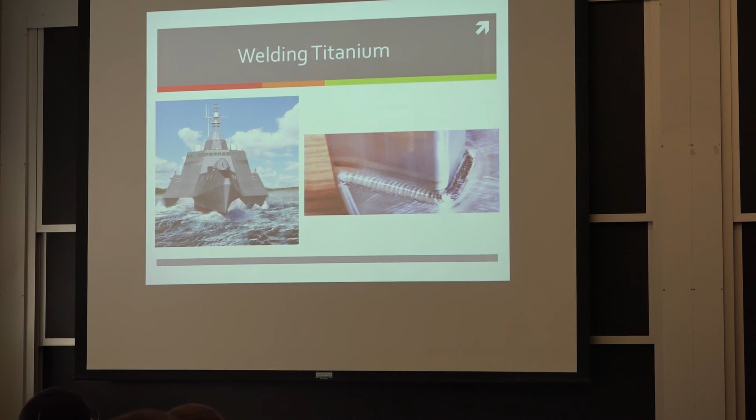Anyway, titanium welds can be very, very pretty, but they can also be contaminated with air very easily.

So one time in the late 80s, I came back from a trip to Japan, and I had an emergency call from Engelhard, who was making catalytic converters for Boeing. And I said, well, what are you making catalytic converters for an airplane for? Well, it turns out there's a lot of ozone up there. And if you breathe ozone for 3 or 4 hours or 5 hours across the country, you'll have a headache.

And so the air you breathe has to go through a catalytic converter to get rid of the ozone. They were rolling out the 747-400, so we date it by that, I guess. They had 2 catalytic converters in there, and Engelhard was putting the platinum catalyst inside, but Engelhard had to weld it. They had 4 welds they had to make.

It turns out they were getting a 50% reject rate on their welds, and they only got one try to fix it, okay? So if you think about this, the odds of ever making a good converter were near zero.

I said to him, look, I don't have time, I just got back from 2 weeks in Japan. What do you clean it with? Acetone. I said, okay, make sure you're using reagent grade acetone. I told them on the phone how to do it. And they called back and they were delighted.

They had just made 10 welds and 9 of them were good, because they were cleaning it well. They were using white gloves, there weren't fingerprints on there, but again, it was whether you're using clean acetone—thin films of grease that you can't even see.

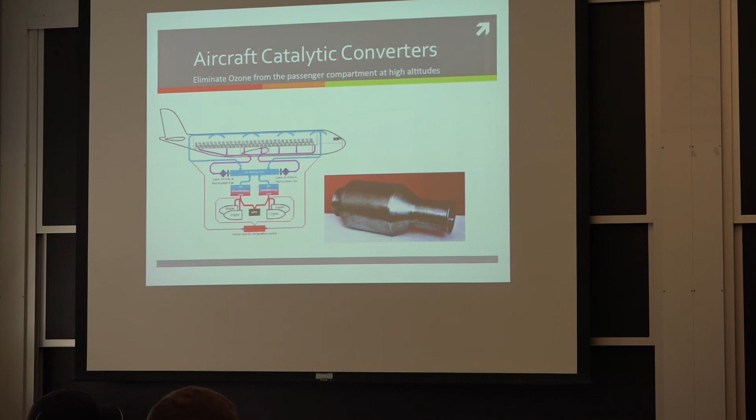So I go by, and guess what? They weren't following the procedures I told them about that got them out of the hot water. They'd gone back to their old procedures. So I said, well, why don't you try following the procedures again? Okay, so cleaning—the point is.

Would most of you consider shipyards white glove facilities? No, okay. So that's why you're not going to build titanium subs in shipyards.

So let's go to the Alvin. Actually, I do have a handout here for you on the Alvin. You can pass that. This will be on the—here, let me just have one so I know what you're handing up. By the way, Jerry has got Stellar up. You'll find the cognitive style of PowerPoint and the Gettysburg Address in 8 PowerPoint slides.

This that I just handed out is from a National Research Council study—this is the study I was on, Future Needs in Deep Submergence Science. And this was, could the National Science Foundation—originally when the Alvin was built in 1964, it was Woods Hole and the Office of Naval Research.

The Office of Naval Research was formed after World War II by the U.S. Navy, because the Navy could do things without an act of Congress, and they could start doing research. There were so many successful technological things like radar and stuff. By the way, you know radar, the home of radar is 3 doors down. There's a plaque on the wall there.

That's where the first Klystron—it was like 1939, we weren't in the war, the British were fighting the war, and their physicists had invented this microwave amplifier, but they didn't have time to develop it. And so there's a book written—I loaned it to someone once and they kept it on a no return plan—called The Most Valuable Cargo Ever to Cross the Atlantic. And it's this Klystron, okay?

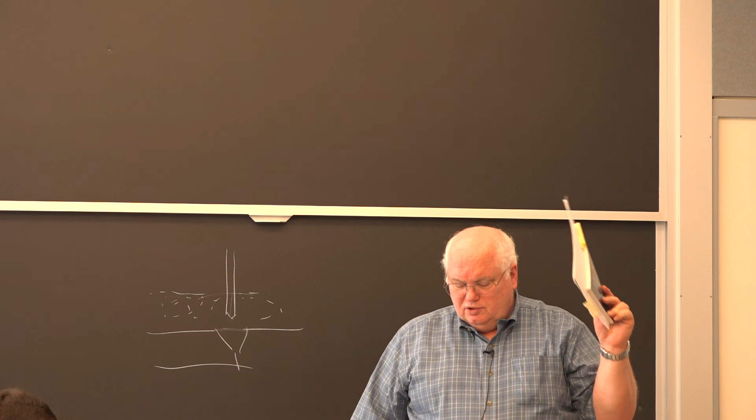MIT employed, I think the plaque says 3,600 people were working on building radar sets during World War II and shipping them off, okay? Anyway, so this ONR in 1972 was told by the U.S. Congress, Mike Mansfield—the Mansfield Amendment said the U.S. military should not do any research, fundamental research, unless it has a military need.

And the Office of Naval Research was actually the precursor for the National Science Foundation. The U.S. Navy in 1946 started ONR out of petty cash or whatever, to do fundamental research. And when Congress decided we needed a National Science Foundation, they modeled it after ONR. The Navy was sort of the basic research leader there.

The Navy paid for it. It was a steel hull originally. Somewhere around 1970 or so, they switched it out to a titanium hull, partly because the Navy was trying to build their expertise up with titanium. I'll tell you another story about the Seacliff, which was another Navy submersible.

But anyway, the Alvin came around to what they call the new Alvin. I was on the committee to figure out whether, for $25 million, which is what NSF was going to have in their budget around 2007, they could afford to build a new Alvin. That's what this study is all about.

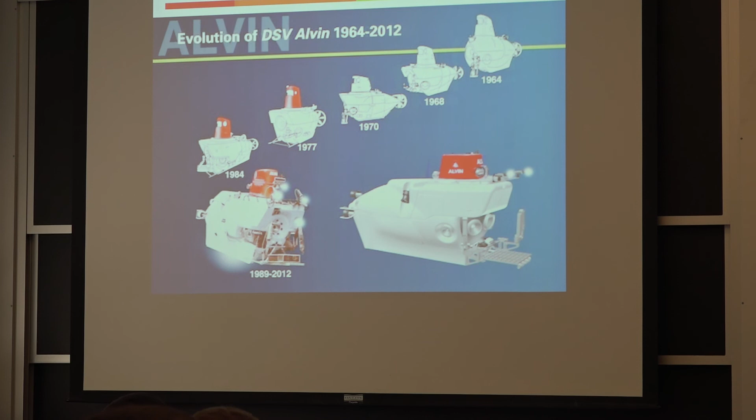Before that, there was the Undersea Vehicles National Needs study, which, if you're interested in deep oceanography, is worth looking at. Out of 36 people or so on the committee, I was the only person who knew anything about how to make something out of titanium. Everyone else was a biologist, marine biologist. They wanted to use it to do science studies.

And they were going to justify why the National Science Foundation should fund it. But I had to figure out whether I was the only one who was going to be able to figure out whether they could afford to build one. And there's a little story to that.

This is an eye test, it's not my slide, but it came off the web. But a little history of the Alvin, we'll post this as far as that goes.

In '66, it was the Alvin that found the H-bomb the Air Force dropped into the ocean off Spain. And so all of a sudden it became a hero ship, because that was a major problem — who was going to get to the H-bomb first, us or the Soviets?

And as a result, in the late '60s, after the Thresher disaster, the Navy spent a lot of money on deep sea rescue vehicles and things like that, and the Seacliff and whatnot.

So the Alvins do upgrades. Before, it just sank to the bottom, and depending on how much ballast you had, that's the level you went to. The new Alvin actually has self-buoyancy, so it can stop on its way down, do things, and then go deeper and stuff.

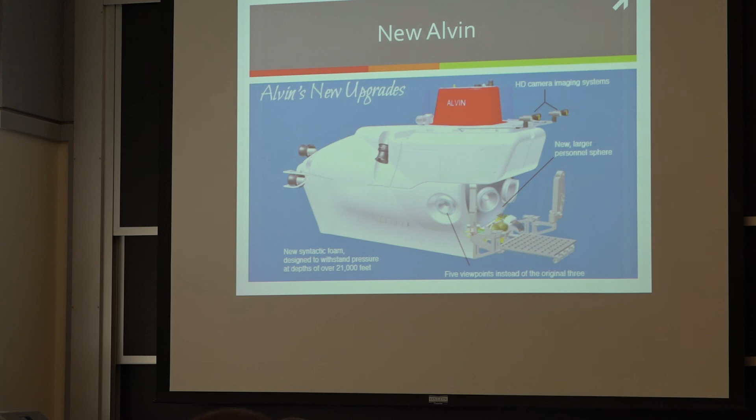It has new syntactic foam, I'll talk about what that is. It has 5 ports, so it's ergonomically better. And we did determine we could build a titanium sphere — at least we thought we could do it. It has a lithium-ion battery, so it's just like your Samsung Galaxy Note 7 that blows up everything.

So syntactic foam — until the offshore guys started doing deep ocean work, really syntactic foam was only for these deep sea submerged vehicles. It's little glass spheres packed inside a resin that hopefully will not biodegrade in the ocean and break under extremely high pressures.

And it turns out they're getting this down to less than 30 pounds, less than 50% of the density of water, and some of it's getting down closer to 40% of the density of water, which is great because they pack every little location with the buoyancy foam. It can be machined to any shape you want, and every available space inside that Alvin is packed with buoyancy foam, so it will float to the surface.

So here's the sphere, better ergonomics inside with the viewing ports, and here's the sphere with 5 viewing ports. You can see 2 on the side, 3 in the middle.

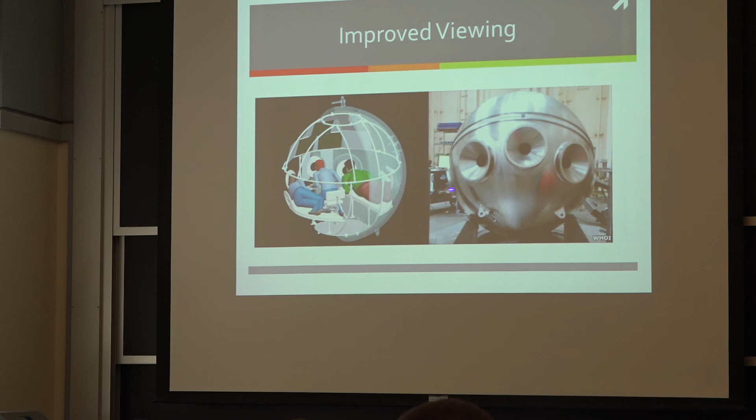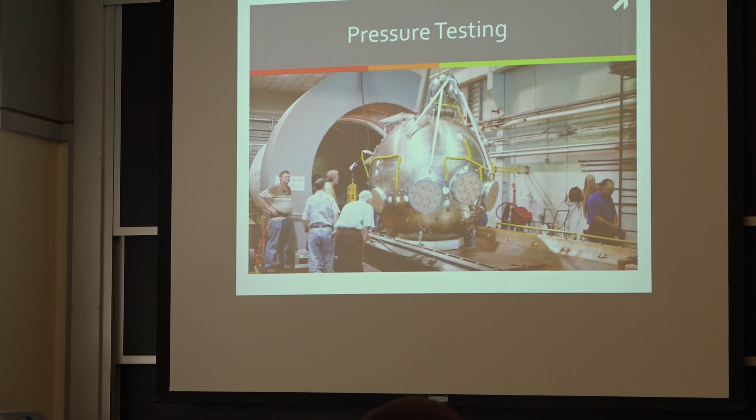We looked to see if we could use it, because the Navy had decommissioned the Sea Cliff but still had the titanium hull, which would have been good to use, except the ship it was too heavy to put on top of the Atlantis. The Atlantis had only a 30,000 pound hoist capacity or something, and you needed 40,000. They would have had to buy a new ship for $20 million, or whatever. So we couldn't use the Sea Cliff.

The Navy tried for 6 months at Mare Island to use gas metal arc welding of titanium, and they couldn't do it. They finally gave up and welded it with gas tungsten arc. Gas metal arc is the hare, running fast and laying down several pounds an hour of titanium. Gas tungsten arc, you're talking about ounces per hour. So it took forever. You probably had 200 passes in this 2 1/4 inch thick hull on the Sea Cliff. It just took forever, but they could do it with TIG, more distortion problems and other things. But the whole thing's machined to a perfect sphere afterwards, because you have to have a perfect spherical shape for these things under such compression.

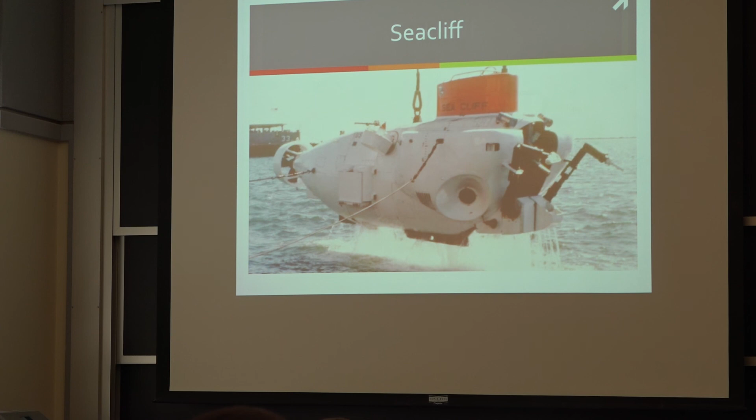So they built the Sea Cliff, but they learned that you couldn't use gas metal arc. This is in the 70s. They still didn't believe you couldn't use gas metal arc. I think they finally learned you couldn't use it.

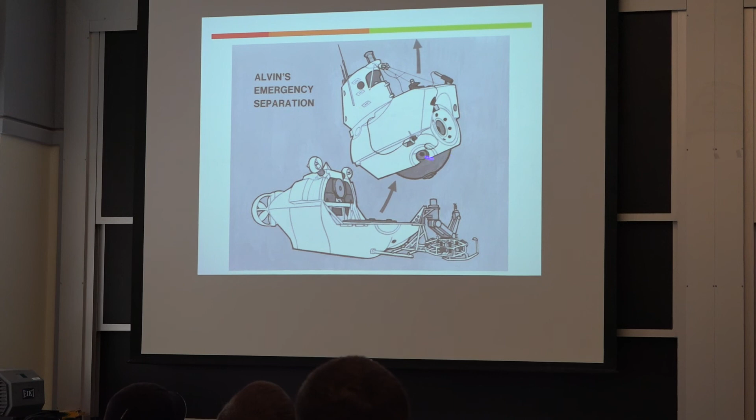So the Alvin, the new Alvin has an emergency separation. There's the sphere and a lot of buoyancy foam, and if you have a problem, you just leave the heavy batteries behind and pop to the surface. But the problem with the Alvin is they still have not had that.

Okay, so there's a little bit on titanium, commercial and military. They still use steel balls to drop to go back up?

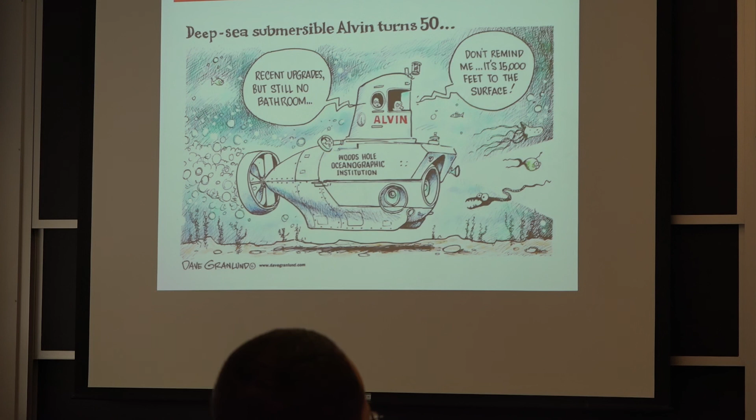No, that was another thing. And they weren't steel balls, they were lead. Can you imagine putting lead in the ocean, a few pounds of lead in the ocean? The environmentalists were aghast that you'd have a couple 100 pounds of lead left at the bottom of 20,000 feet in the ocean. Can you imagine the pollution coming from that? All those dead fish who had brain damage, okay?

Anyway, actually, you're right, they do have steel balls now. They did switch to steel because iron oxide is considered non-toxic. If you go over to Harvard School of Public Health, iron oxide is the non-toxic control when they do tests. You can breathe iron oxide, you can get what's called siderosis, and they see dark x-rays because the iron is extra dense compared to your regular lungs. That's one of the things they find about people who weld. If you've been welding for 30 years and they do a chest x-ray, you will have siderosis. You've been breathing welding fume all those years and you have iron oxide in your lungs. They also find that in the next 10 years, your body will slowly expel it and get rid of it. There are no known toxic effects from that.

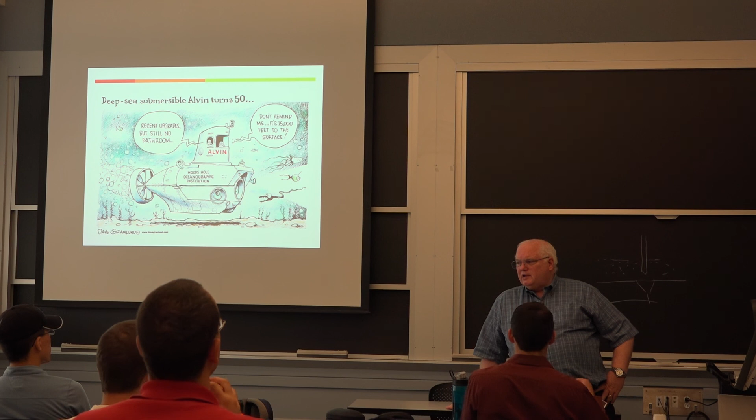So iron, you're actually right. As I think back, they switched from lead to iron as their ballast. The way they get back up is they start out with a bunch of steel balls and they can drop some of them and the environmentalists are happy. So you're right, it is steel balls now. But it was lead before. And that was the issue, how to get the lead out.